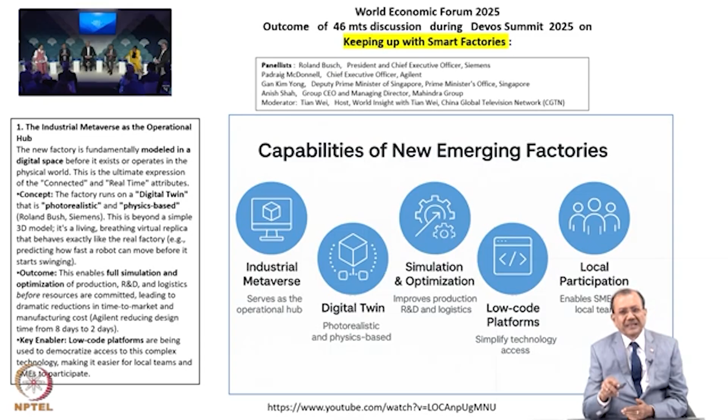So you are able to simulate beforehand what is going to happen, any eventuality. This kind of technology is used in very complicated systems like spacecraft, and sometimes now also in nuclear power plants. So it is very important that we should know the digital replica of a nuclear power plant, a high risk area. I thought I would bring this concept to you, and you would like to further explore this idea, whosoever is interested.

The second thing which we already discussed in the previous session, and they all have agreed, is intelligence driven autonomy and proactive control. The model moves from being reactive to being entirely proactive and self-optimizing.

So today's world, the smart factory has to be self-optimizing. We need not to optimize them; the technology has been deployed in such a manner that it optimizes its own function. You need not teach all the time or give direction. This is where technology plays the role. Thanks to technologies like humanoids, they sometimes have their own thinking based on algorithms and deep learning kind of algorithms, and they can optimize and take action as per the given situation. This is the definition of high level intelligence.

Proactive quality: AI systems are monitoring production parameters like weld temperature, material flow, and energy usage. These are the words of these panelists, not my words. They started talking, they narrated this from their examples, AI systems. I have also shown this over here in a picture. Autonomous decision making, AI agents.

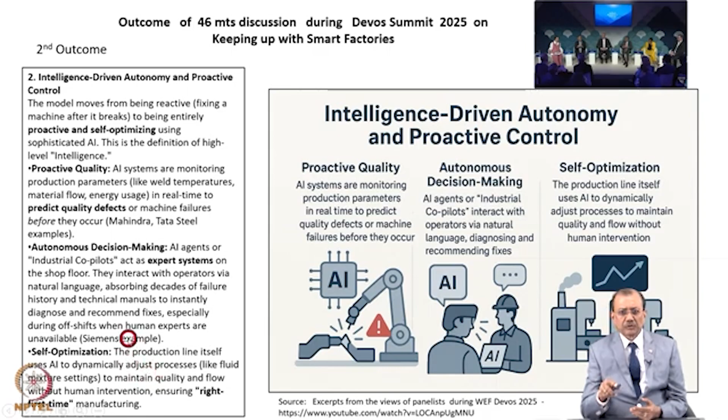We will be seeing in this presentation some of the dialogue in natural language, the generative AI and self-optimization. These are the new trends in the smart factory arena - intelligence-driven autonomy and proactive control, and the end-to-end boundary-less value chain. We have already discussed these facts, but here they have expressed, with the help of some of their own experience, the full integration across functions which we discussed in the previous session.

Resilient operation - this is a new term, and this is the phenomena of Industry 5.0. The resilient operation, the agile and resilient operation, this is the phenomena of Industry 5.0. Thanks to technology, with the help of technology we are able to develop resilience in the operation, resilience in our plant operation, so that rapid changeover and mass customization is possible with that.

I hope you understand, and there are some examples one can find from Unilever, which is one of the global lighthouse companies, with strong resilience against supply disruption. So Unilever has developed a system which has this resilience kind of phenomena, which has capability - I will say strong resilience capabilities.

Is there any disruption in the supply chain? Suppose a supplier is not supplying, or there is a shortage of some raw materials, whatever - how do you, without completely stopping the operation or manufacturing, create a new situation and a new kind of pattern in your manufacturing, so that operations keep moving and should not be completely affected. It will be affected, but not to that extent. So that is what strong resilience is, and technology is helping over here.

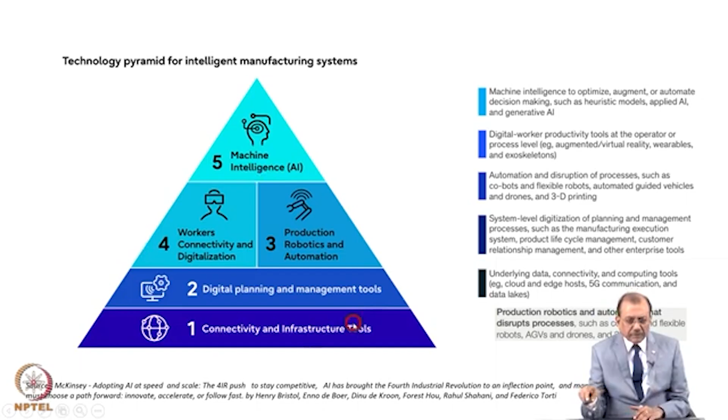Machine intelligence is used to optimize, augment or automate decision making, such as heuristic models, applied AI and generative AI. So the ultimate objective of the intelligent manufacturing system is to develop machine intelligence. As we have intelligence as human beings - suppose you are a doctor, you have intelligence to diagnose and then recommend some medicines. Like that, with the help of this kind of infrastructure and facilities, machines should develop intelligence, and that is what is being attempted now in the industry sector by those trying to adopt intelligent manufacturing systems.

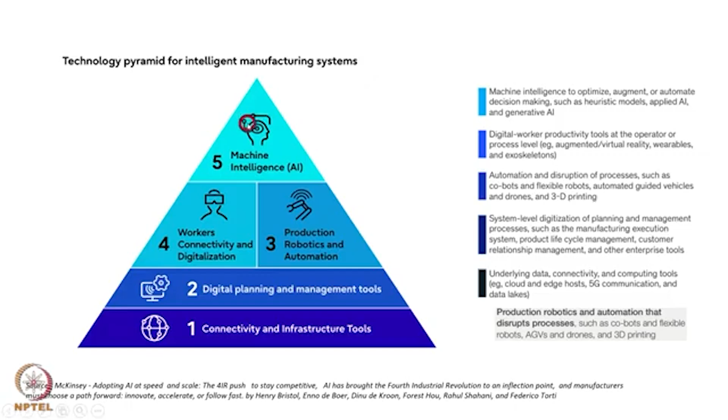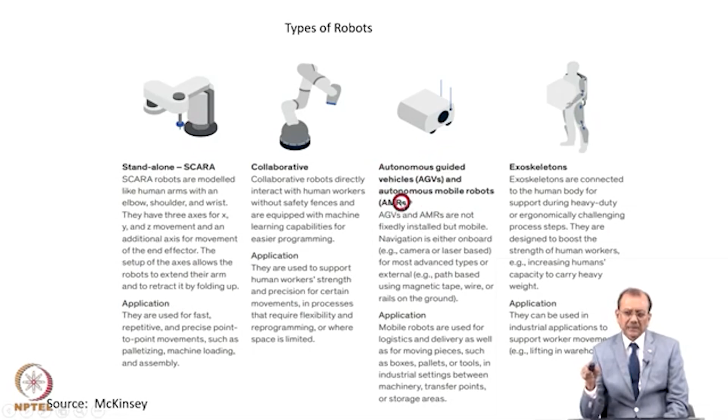AGVs are also very commonly used in drone technologies, which we know. I'm not discussing that area, drone technology, right now, but AGVs have great scope in the defense sector also.

Exoskeleton is a robot connected to the human body for supporting during heavy duty and ergonomically challenging process steps. So these are new generation robots connected to the human body, human exoskeletons, and those industries which require heavy duty work by humans, like lifting etc., these robots are being commonly used in those industries.

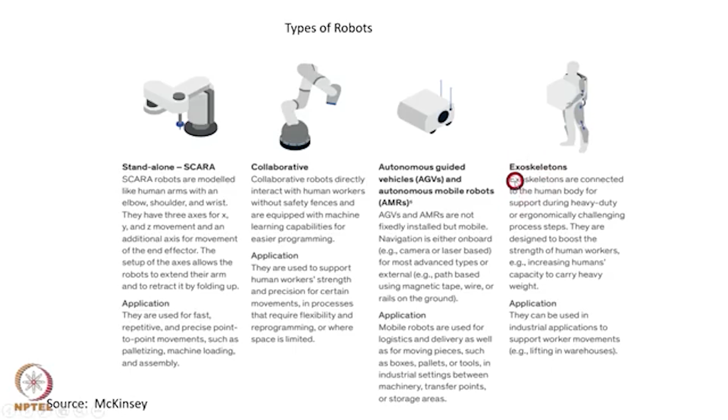You are seeing a very interesting picture, a very basic configuration of a robot. I have taken this picture from javatpoint.com. You can see that basically the robot has these 10 kinds of components, and it also runs under one operating system. This robot is under Linux, but nowadays robots have much more robust, advanced systems which are not simply the Linux OS.

It has certain capabilities like voice recognition, sometimes temperature monitoring, sometimes noise monitoring or sound listening, etc. To some extent, now robots are able to express emotions, which we have seen when robots are working on the reception desk, or robots are working in hospitals. So there are many kinds of robots that have come, and this is some basic configuration you can see here.

On the left hand side, I have put some of their components like power supply, actuators, and then electric motors - DC, AC motors, depending upon whether you are using DC or AC current - and sensors. This is a very important area of sensors, and we are very lucky that there is great advancement in the field of sensors, and that's why this robot technology has become so powerful and so useful.

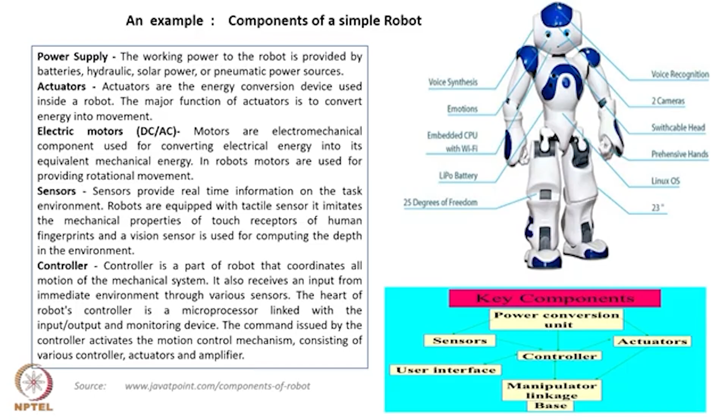And then there is a controller sitting, which is a computer that coordinates the function of this robot. You can see here I have shown a schematic diagram also. So maybe you would like to further explore this picture and expand it to understand the advanced robots, what all they are doing, and their configuration.

And what is humanoid, which we will explore in the next session - what humanoids are and how they are helping mankind in various areas, and what is the role of humanoids in the smart manufacturing arena also.

So all these examples which I am trying to show are from very relevant sources, and I find it very difficult to explain all functions of the robots. It's a fast emerging area. It's not that the robot is only a recent technology - it is more than 20-25-year-old technology, but the growth and diversification we are finding in robot technologies is mind-boggling.

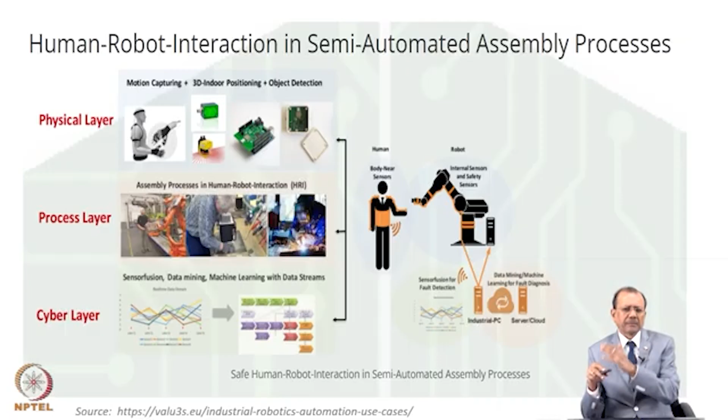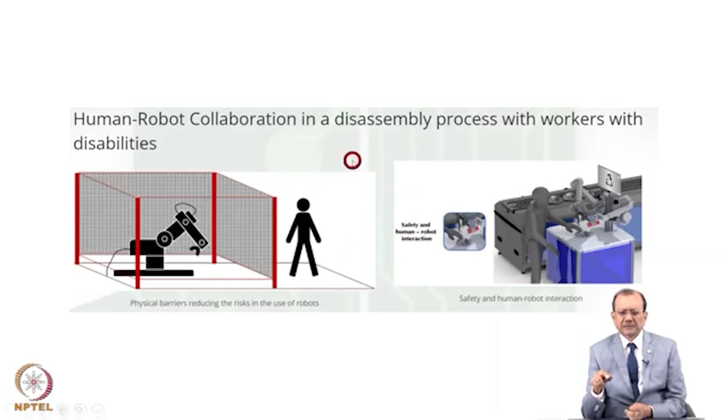This is another setting of human-robot collaboration, where the robot is helping a human for the assembly or disassembly of some equipment. This is another field of physical AI.

World Economic Forum and BCG are promoting this field of physical AI. Now, instead of discussing robots, the discussion and development is going this way because today robot technology is becoming an AI replica. I will say that AI is the backbone of the robots. So how is AI, what kind of roles is AI playing today.

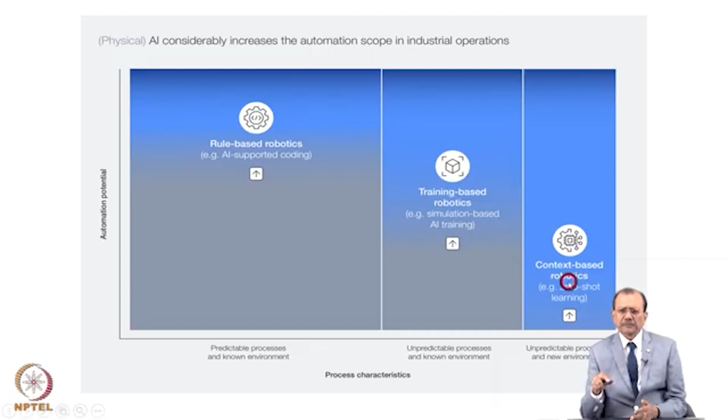In this picture you are seeing three kinds of roles: rule-based robotics, training-based robotics, and context-based robotics. Rule-based robotics is AI-supported coding. I would like to cover this area in the next session when we discuss humanoids.

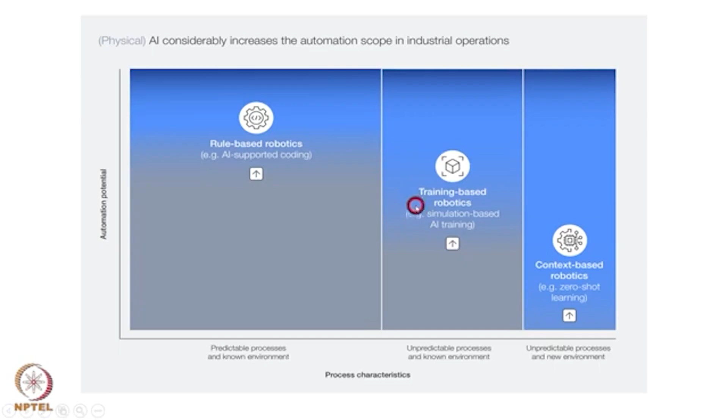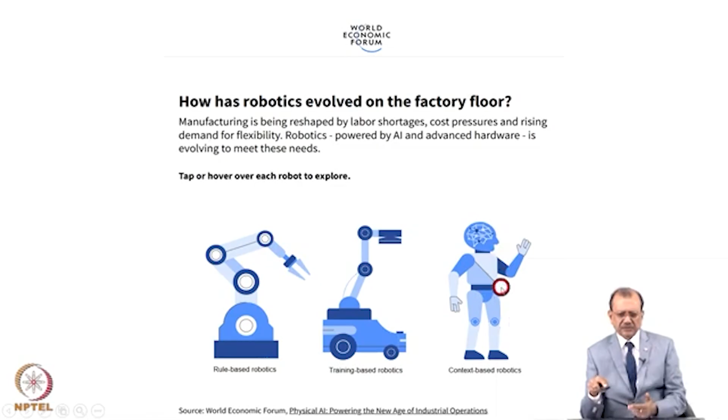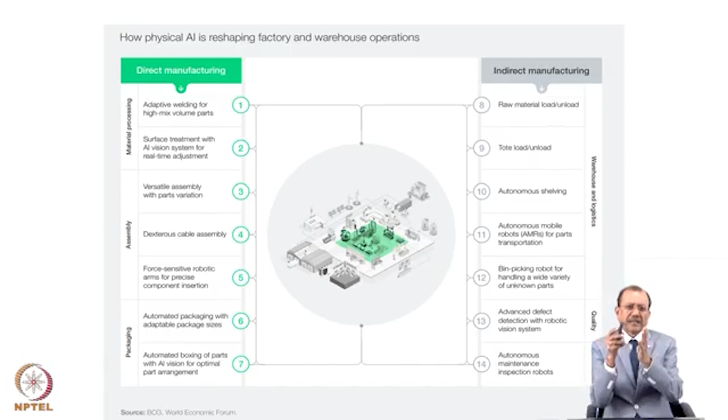This again, as I said, is a good development of physical AI. The subject is becoming more organized and structured - the robotic science is becoming more organized and structured, and it is taking the shape of something like physical AI. This slide I have taken from a World Economic Forum study, the URL for which is given in the previous slide. You can go through that study completely.

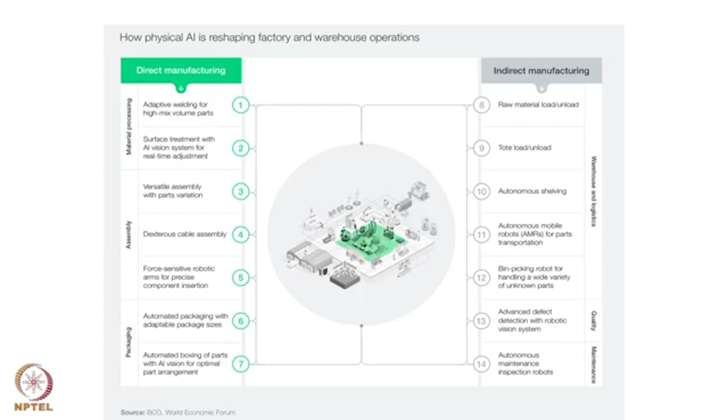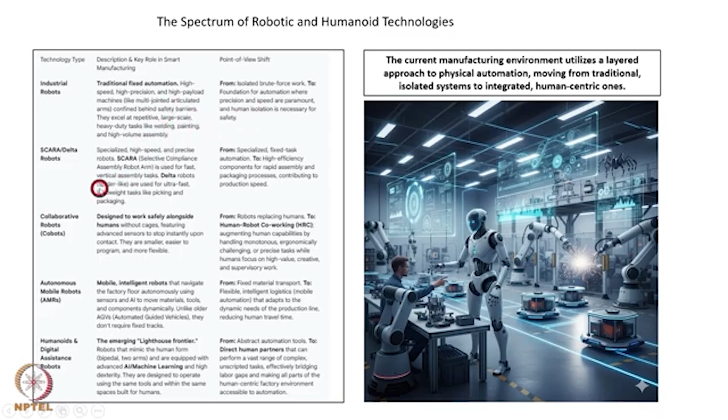So what is the area which I have mentioned here? This is something I already discussed when I talked about the McKinsey slide - the industrial robots, the traditional robots which were being used in the assembly line in the automobile sector and some other sectors, SCARA sector. The future of work will depend upon the growth of robotics, so this is where robots play a key role in our industry.

So with this word I would like to sum up this session, and hope that you understood the basic concept of robotics and robots, and what I have discussed about the outcome of the discussion. So, thank you very much for your kind attention.